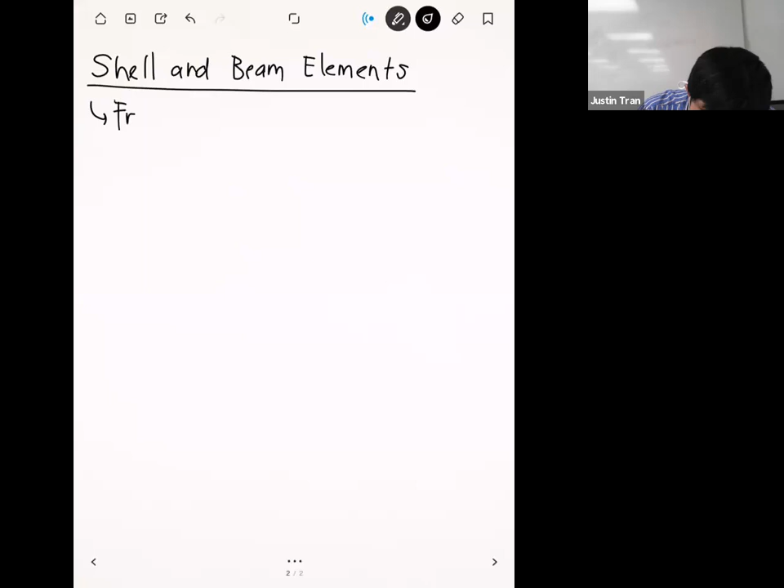So far we've covered a bunch of different element types, but they all kind of fit under the same category. So far we've covered what I like to call the solid elements. From this point forward, I'm going to assume that we're strictly in 3D. When I say the standard elements or the solid elements, I'm specifically referring to tetrahedrons and hexahedrons.

The reason we call them solid elements is because the elements themselves form a solid volume, a solid three-dimensional object. All of these elements have height, width, and depth because they're 3D. We've talked about these as kind of your only options for meshing a three-dimensional object, right?

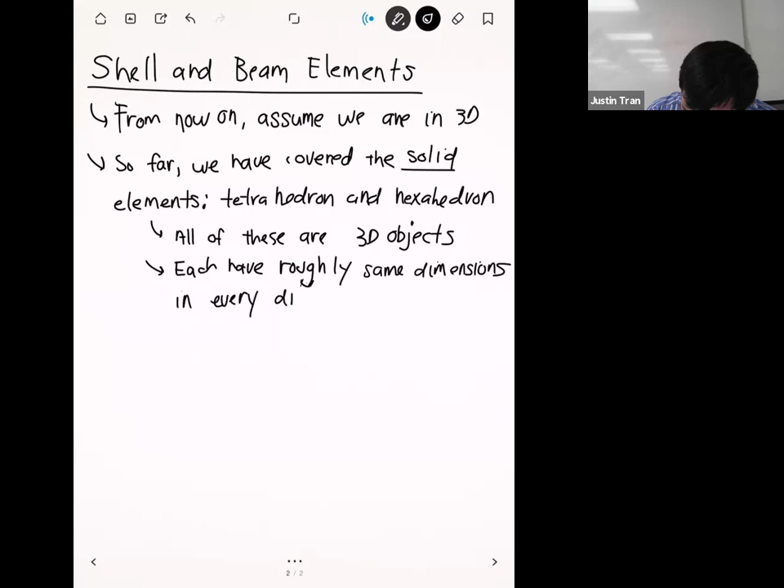Because of that, these solid elements work really well to mesh objects that look the same as that. If your solid object has roughly the same height, roughly the same width, and roughly the same depth—all three dimensions don't have to be exactly the same, but if they're all on the same order of magnitude—then your solid elements are going to work really well for these.

An example I have here on this desk is this mouse. If you look at the length of the mouse in this direction, the width in this direction, and the height in this direction, they're not exactly the same, but they're all roughly the same. So if you were to do a finite element analysis on this mouse, you could do it just fine, most likely with tetrahedrons, because it's so curved—hexahedrons might struggle a little bit with this one. But there's a lot of engineering geometries that actually don't fit this bill.

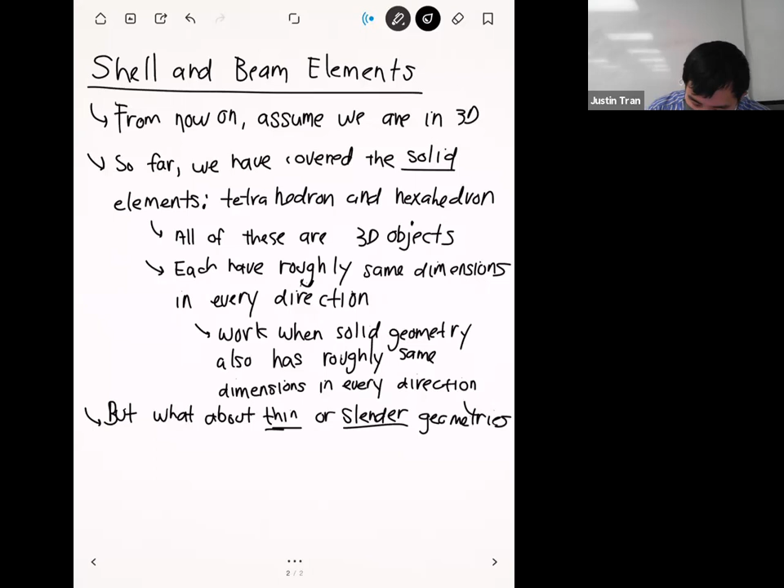What I like to call them is these are geometries that are either thin or slender. These are geometries where I characterize that at least one of the dimensions is significantly smaller than the other ones.

So one example here I have right in front of me is my phone. If you look at my phone, the width and height are kind of roughly the same, so they're the same order of magnitude. But if you look at the thickness of this phone, it's a lot thinner than it is tall or wide. This is what I'd consider a thin geometry, because you have one dimension of the phone which is much, much less than the other ones.

An example of a slender geometry would be like this pen. For this pen, you have one dimension that's fairly long, which is the length of the pen. But if you look at the cross section of the pen, both dimensions in that direction are much smaller than the other one. So that's something I would consider a slender geometry.

For these types of geometries, if you try to mesh them with solid elements, they can struggle a little bit. So what's actually more efficient to use in this case are more specialized element types for these situations. Those element types are called shells and beams.

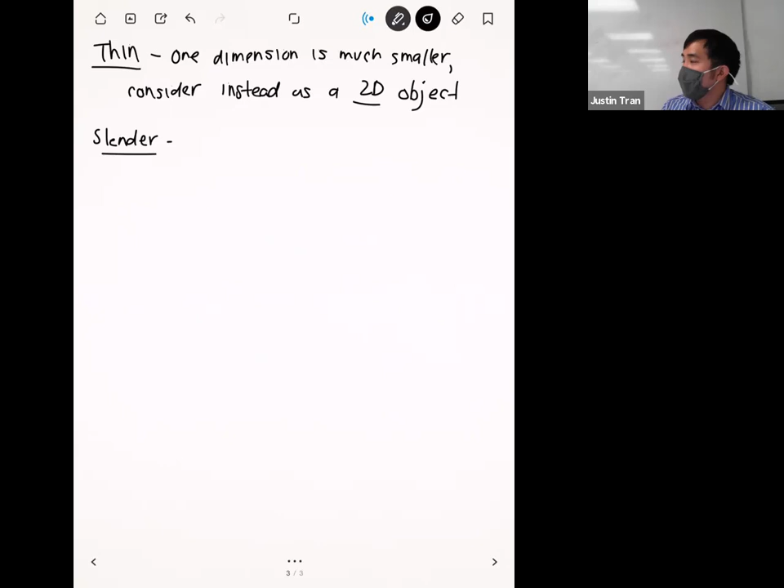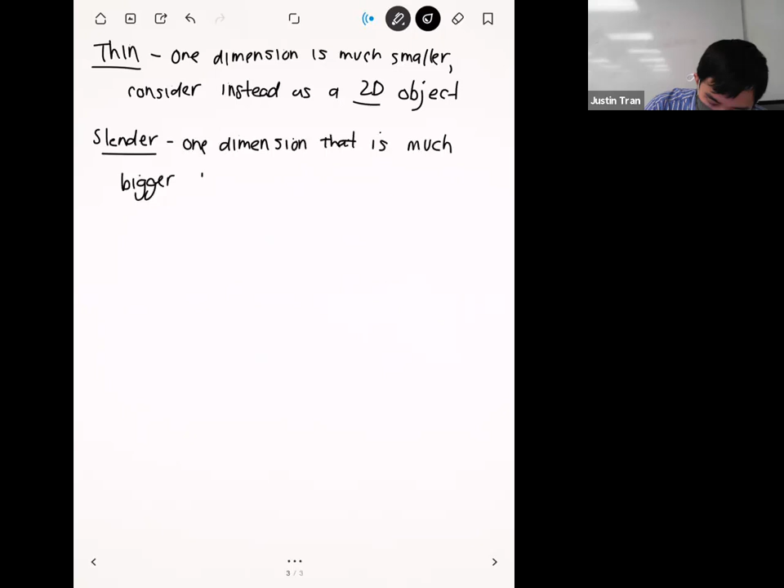And so for slender objects, these are kind of the opposite, where they have one dimension that's significantly bigger than the other two. Basically those other two dimensions may as well not exist for these objects. So we can save a lot of cost if we consider these slender objects as a 1D object.

So basically, let me draw an image for you. We have a very thin plate like this. What we want to replace this with is just a literal piece of paper, or a literal sheet. And if we have a three-dimensional beam, let's say we have a beam like this, we're literally just going to replace it with a line.

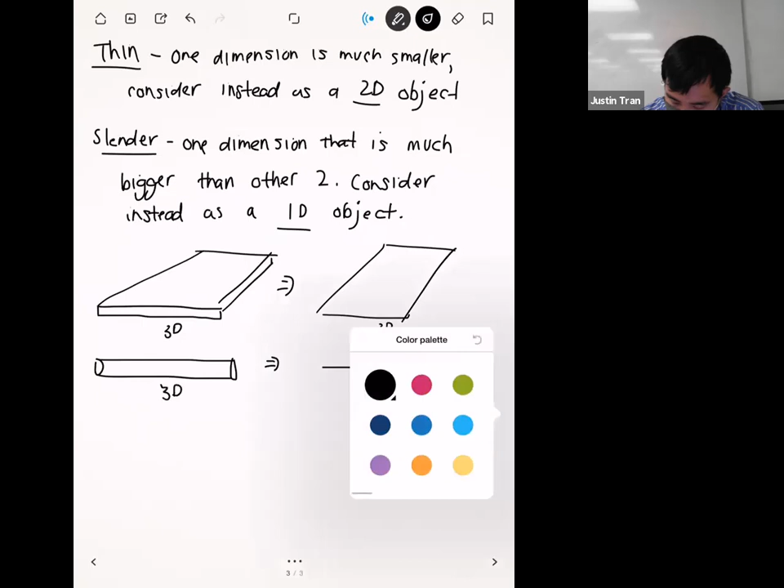So this would be the 3D version of these objects, and then we're going to reduce this down to 2D for the thin geometry, and for the slender one, we're going to reduce it to 1D. These special element types, an element type that can take a 3D object and replace it with a 2D one, are called shells, whereas a 1D representation of a slender 3D object, we call these beams. Hence the name of the lecture today: shells and beams.

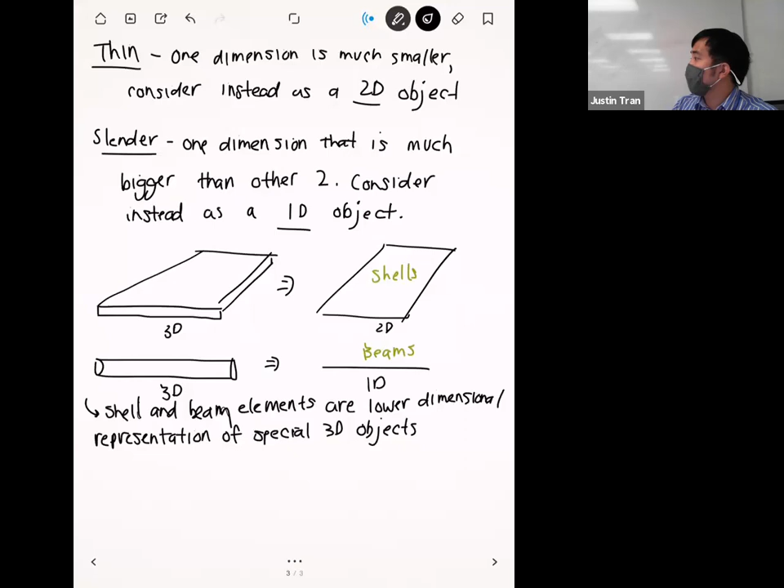We'll talk about each one individually, but to give a general definition for them: shell and beam elements are a lower dimensional representation of special 3D objects. And they're unique in that they have a different mathematical formulation. We're not going to go into what that formulation is, but we'll talk about the effects of that formulation.

And this formulation kind of gives us two main benefits, right? And it almost seems too good to be true, because what this different formulation gives us is a result that's cheaper, right? It's not going to take as much computational cost to use these small elements.

You'll have less nodes and less elements overall when you switch to shells and beams, for a specific case. And it actually gives you a more accurate result.

Because remember, usually we don't get this. Usually if we want a cheaper finite element simulation, we're going to have to sacrifice accuracy. Whereas if we want a more accurate finite element result, it's often going to cost us more computational power to do that. The use of these shell and beam elements actually gives us both at the same time, which is a very unique thing.

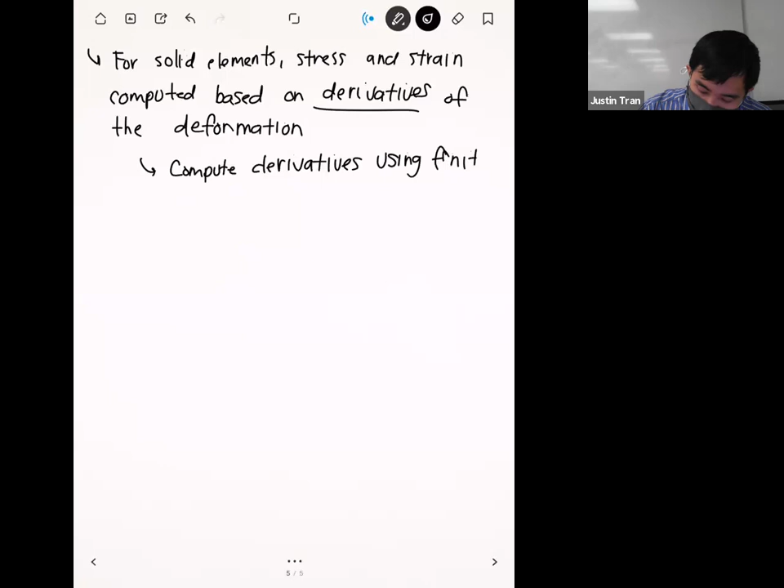Finite difference is a big method that we could spend a lot of time talking about, but I just want to make one important point here. Let's say we have a particular element like this—a 2D element—and let's say we want to compute the derivative of the solution in terms of x.

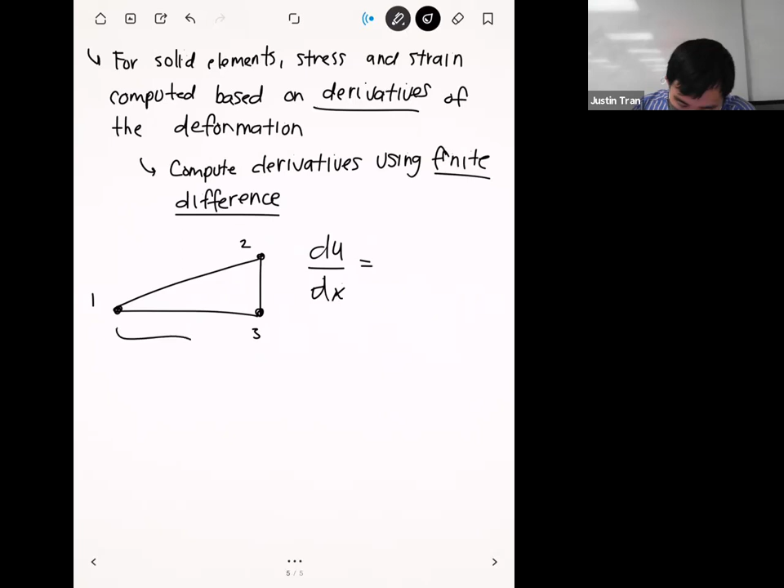The way it does this is that it literally takes the difference between two solution values at two different locations in the mesh, and then divides by the distance between them. Let's say the distance between these two points is Lx. We have the solution at node 1 as U1, and the solution at point 3 as U3. The finite difference approximation of this derivative is literally just U3, the solution at node 3, minus U1, the solution at node 1, divided by the distance in between, Lx.

For cases where you have a geometry that's not thin or slender, this is perfectly fine. If you have a decently thick geometry with lots of different elements through every single dimension, you're going to be just fine doing this. But what can happen sometimes when you have a thin or slender geometry is you might have situations where you only have one, maybe two elements through the thickness of your geometry.

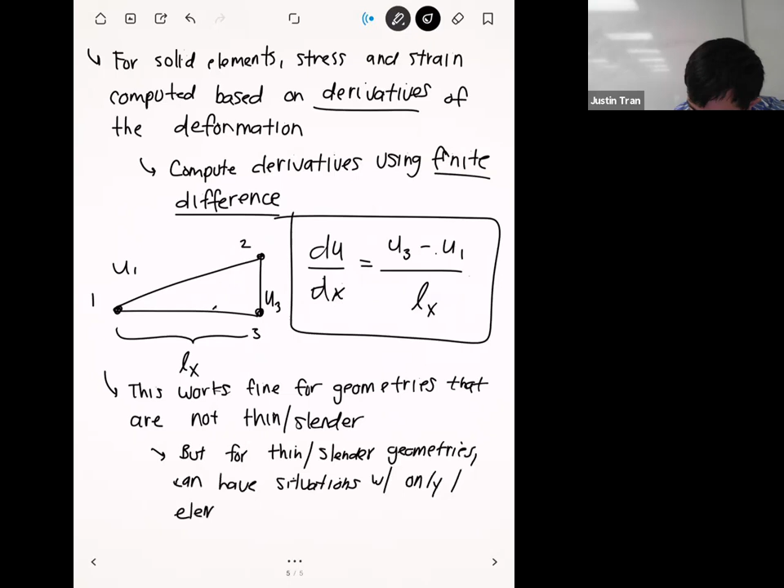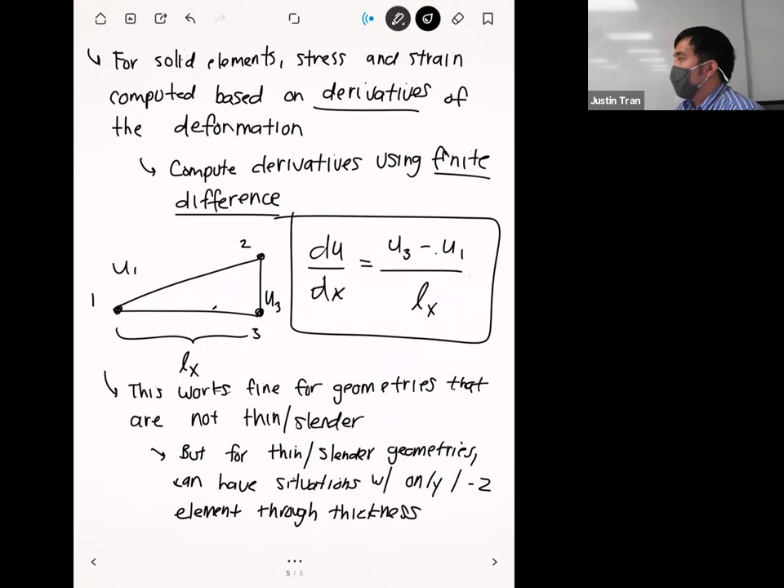What I mean by that is if you look at your geometry and mesh, going from one boundary surface to the other, you only cross one or two elements. I'll draw a picture of this on the next page to make it clearer. But in these situations, you want to be careful when computing derivative-based quantities, because they can be unreliable—all the nodes used in this calculation are on the boundary. Because these nodes are on the boundary, and in some cases both nodes are on the boundary, you kind of already pre-prescribe what your derivative is based on the boundary conditions you apply. Even if you don't apply any boundary condition there, being on the boundary means you're also subject to certain edge effects. We'll talk about that more on the next page where we draw the picture. Any questions on this?

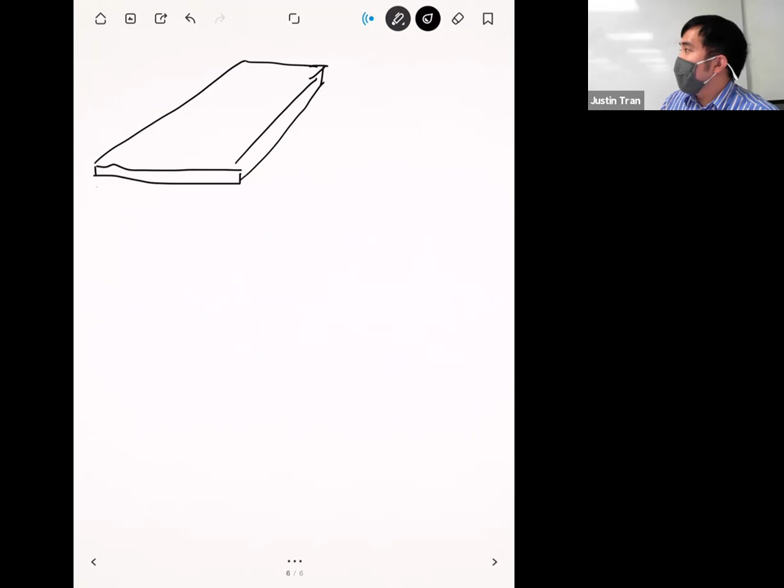Okay, so let's draw a picture to show what can happen if you have a thin geometry, just to make it a bit more clear. Let's say that we have a very thin plate. Maybe this is part of your finite element geometry.

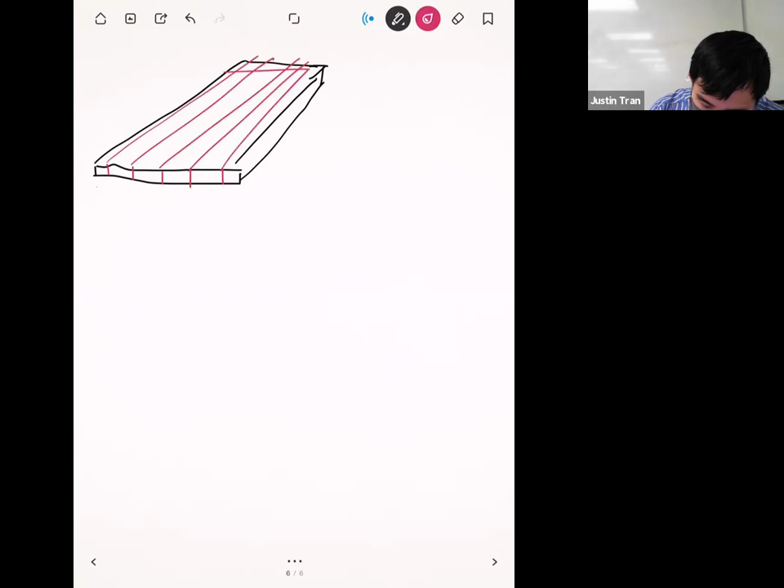And then let's put a mesh on this. Let's say that we mesh it in a way that looks like this, and of course these element edges go in this direction too.

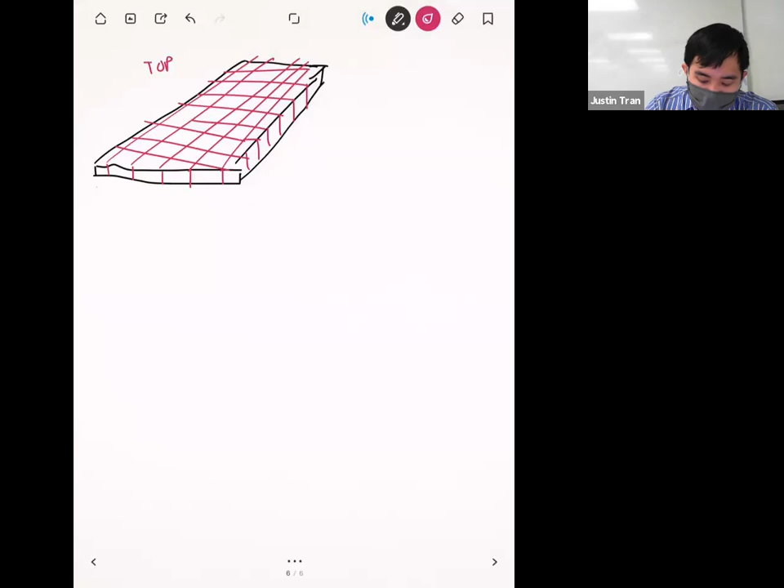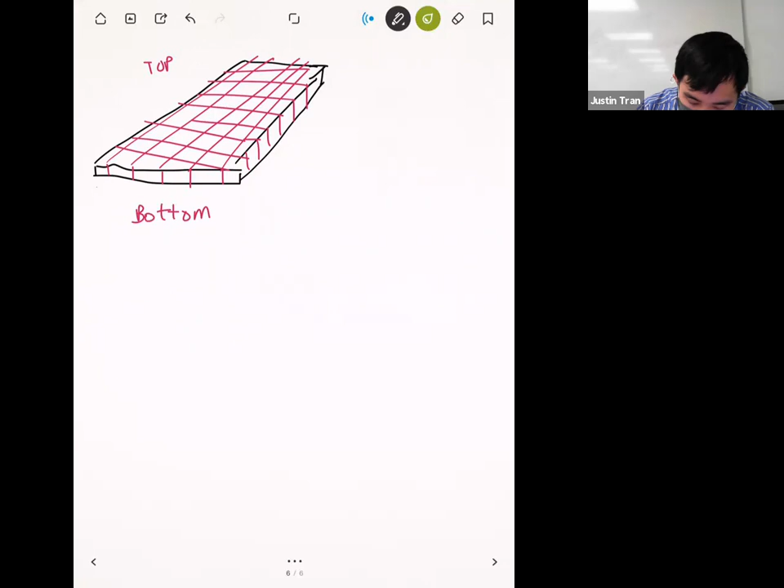In this situation, if we look from the top of this geometry to the bottom, and we take this path—we'll just look at the very front, from here down this direction—we only cross through one element. So this is a situation where we only have one element through the thickness of this geometry.

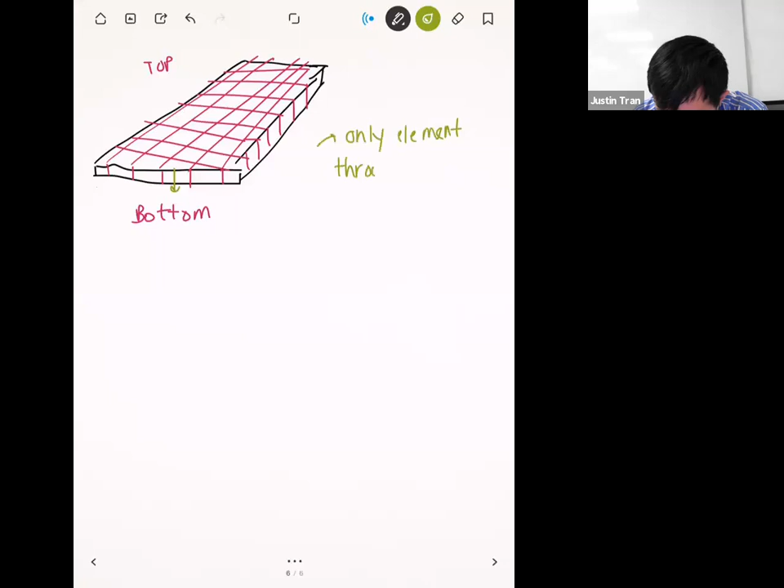Imagine if we were to take a derivative in this case. If we want to take a derivative in that direction, going from top to bottom, the nodes we would use for that are this node right here and this node right here—both these purple nodes.

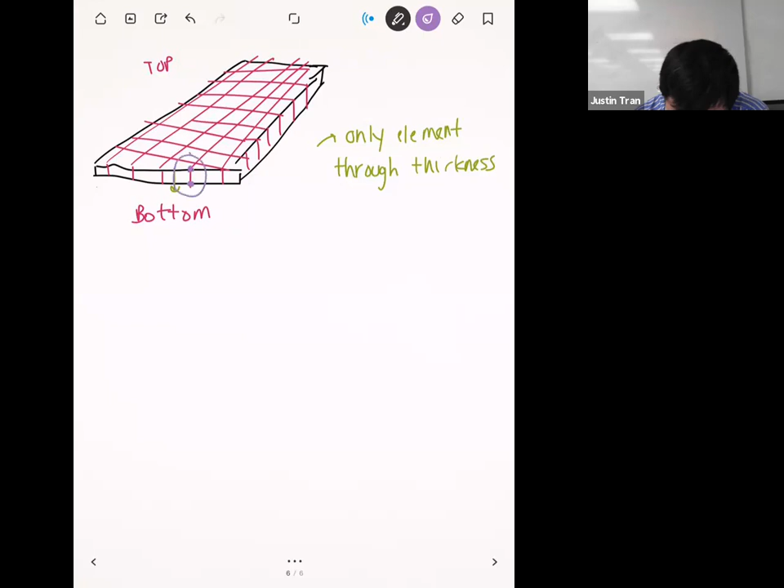And so the issue with computing a derivative with nodes like this is that both of those nodes are on the exterior of our geometry.

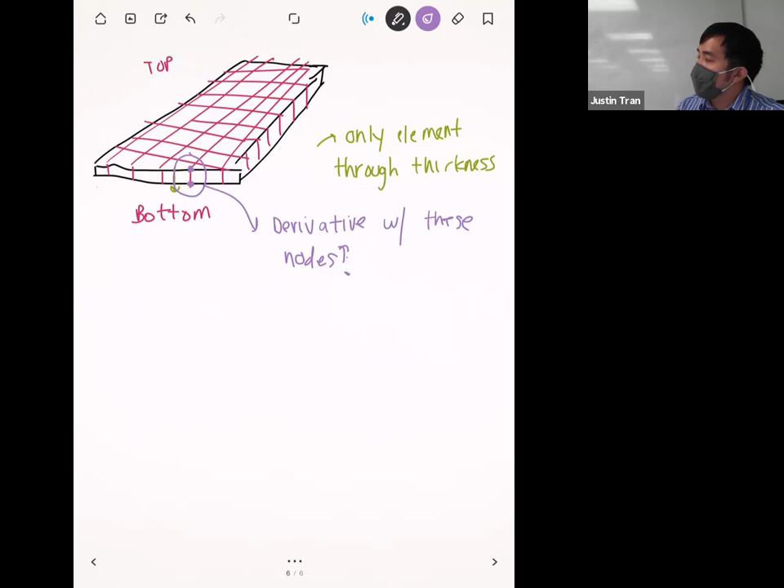And so that's usually not a good idea because if you have nodes that are on the geometry, first of all, if you're applying a boundary condition there, like some kind of force or a fixed constraint, that's going to mess up the computation of the derivative there, especially if you apply a boundary condition on both. But also you can have what I like to call edge effects, which create sometimes undesirable effects on your solution. So you want to avoid situations like this when taking derivatives from nodes that are both on the boundaries.

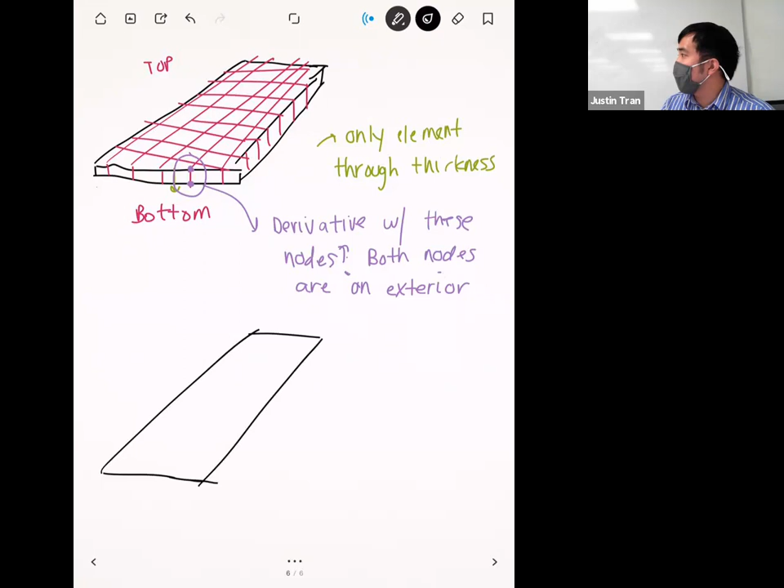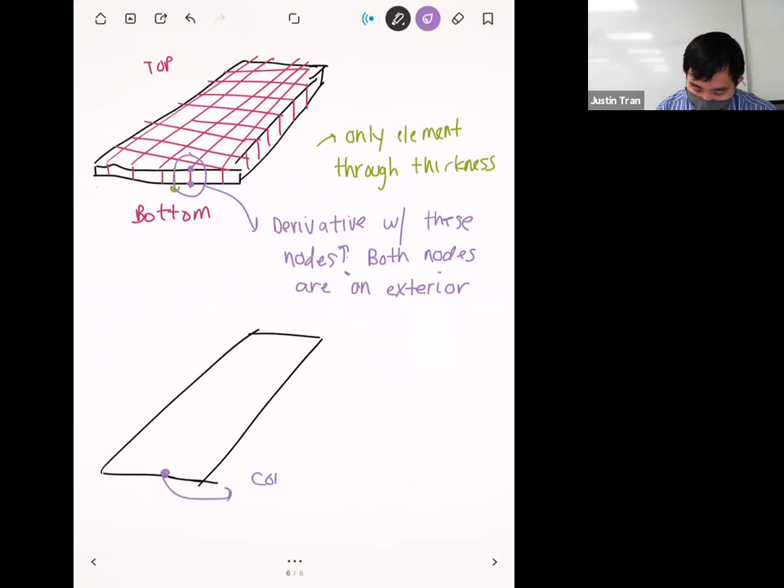So one way we can get around this is if we instead replace this thin geometry here with a simple 2D one—let's say we replace it with a sheet, a 2D sheet like that. And then let's say we want to do the same exercise where we want to compute the stress right here.

Instead of relying on a solution derivative in this situation, what we can do instead is use the extra degrees of freedom that we're computing—we can utilize the nodal rotations here to compute the stress more accurately.

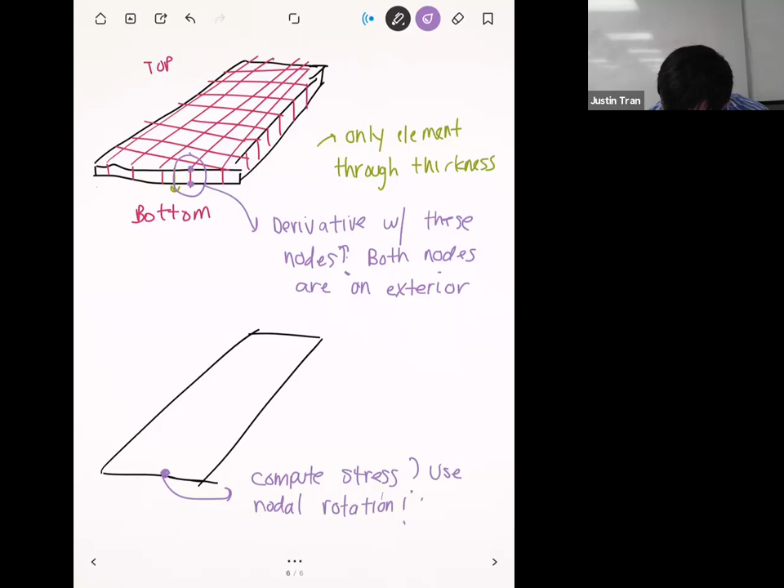And what this does is help us avoid taking derivatives at that location. The stress is computed based on these rotations instead of derivatives. First of all, it saves you from computing derivatives, which is itself a little bit of an expensive process—not that expensive, but it's something. And because these rotations are directly computed from the finite element result, you end up with a more accurate solution overall because of it.

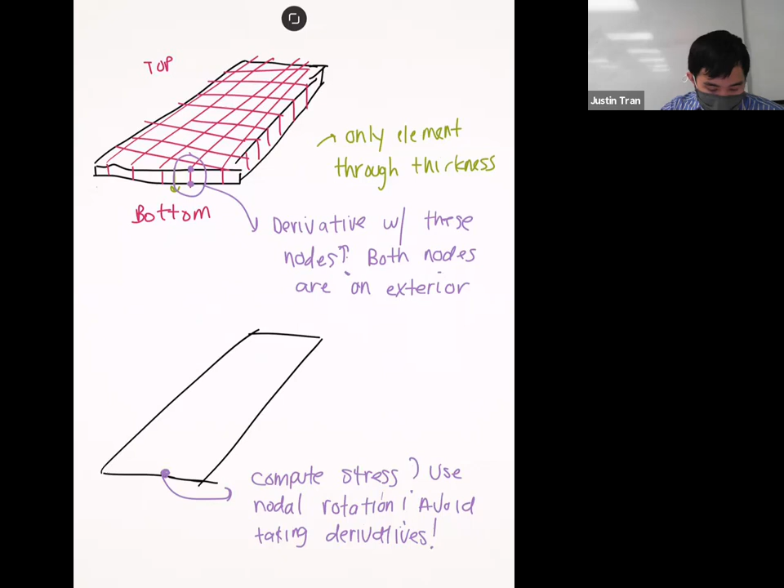So that's the justification for why, when you can use shell and beam elements, you end up with a higher quality, cheaper solution overall. Any questions on this?

Question from the chat: would it be possible to compute the nodal rotations for a solid element? I'd assume yes, just needlessly expensive. Yeah, no, you're exactly right.

It is technically possible to compute the rotations in a solid element, it just adds a ton more cost. And it's not just computing three extra variables for each element—it actually modifies the equations quite a bit, so it would have to be a whole new implementation to compute those things. Good question.

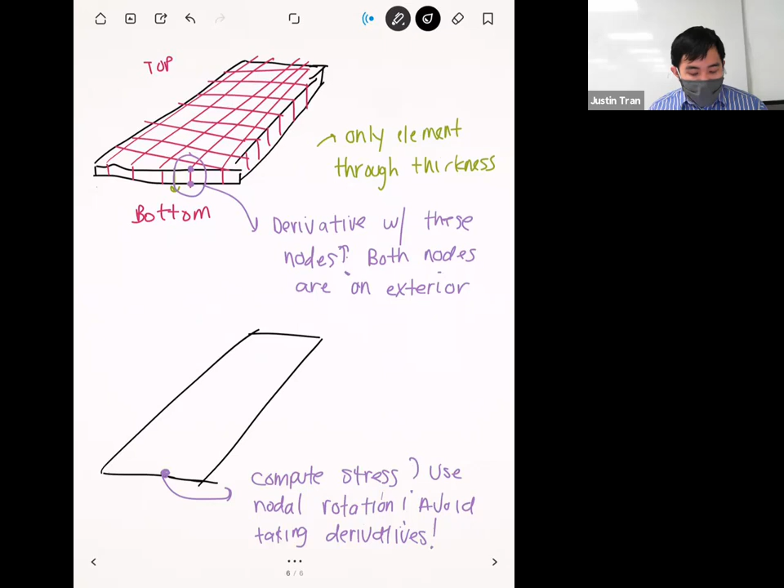Any other questions on this? Okay, so that's the justification for why shell and beam elements are useful. So now let's talk about when you can use these and how to actually implement these in practice.

Throughout today I've just been mentioning that you should use shell and beam elements when your geometry is thin or slender, with air quotes included. But what does that actually mean? Is there a threshold for when something is thin enough or slender enough that you want to use shells and beams?

Okay. Because it would be really nice if we can say that this has certain geometric dimensions, and so for sure we should use shells and beams for this.

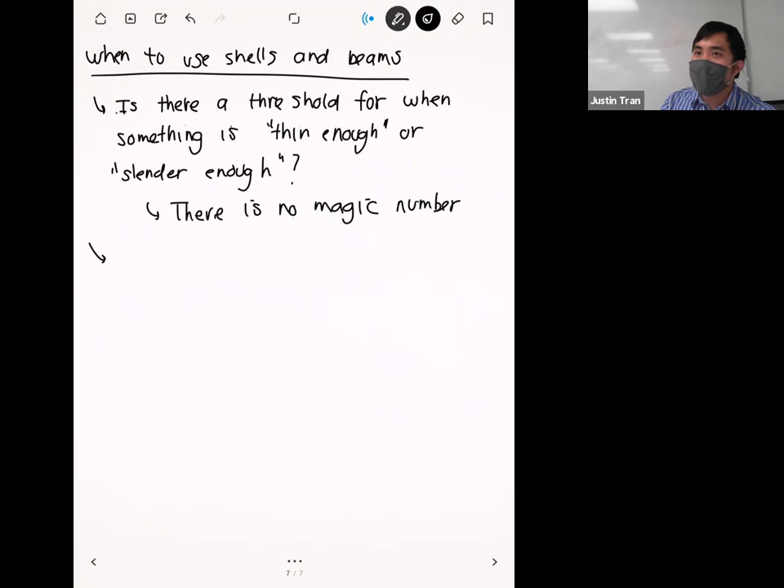My threshold for using shells and beams is I like to use a 10% rule. What I mean by that is if there's a dimension that's less than 10% of the other dimensions, then I consider that to be thin or slender.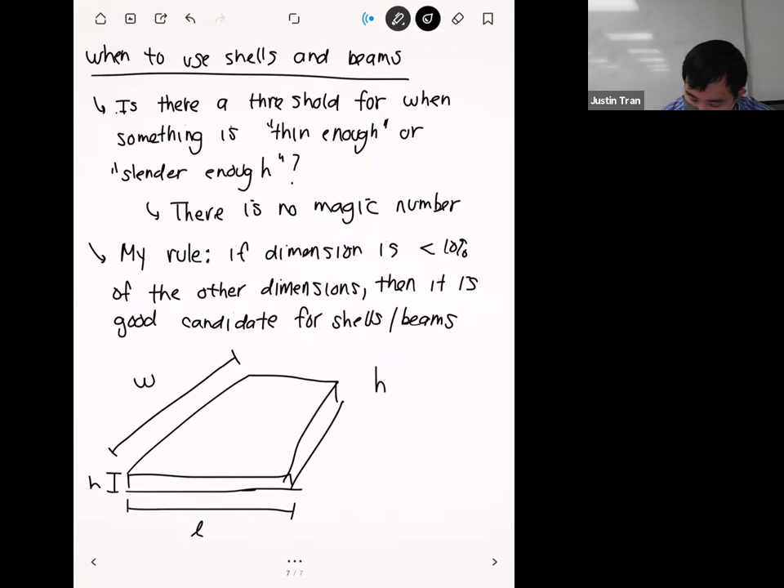As an example, if you have a thin plate, let's say this is the height of the plate, this is the length, and this is the width. You can see from this image that the height is the smallest dimension we have. So my criteria is that if the height is less than or equal to 10%, or 0.1 times the length, and h is less than or equal to 0.1 times the width...

Then this is the criteria I use to say that this geometry is thin enough that I can replace it with a shell. This is my own personal threshold, and it's served me well in the applications I've used it in, but I also know people who would disagree with me, so keep that in mind.

Any questions on this?

All right, so now let's talk about how we actually incorporate these in practice. This is a bit of a preview of what we're going to do on Wednesday, but I wanted to talk about it in lecture format before we're actually clicking stuff in ANSYS, just so you know what's going on.

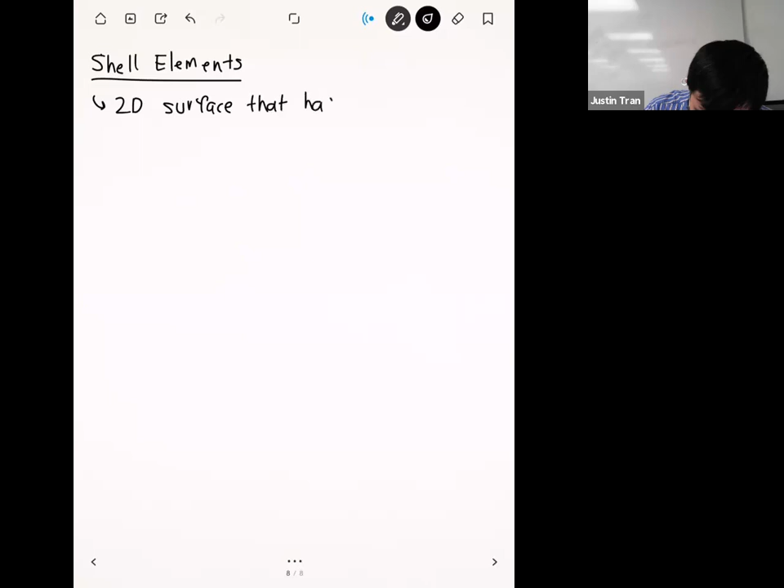All right, so let's start with shell elements. The definition of a shell is basically a surface that has a very small thickness. So it's a 2D surface with a small thickness, and it's used to represent geometries that are very thin.

But what it does is that instead of representing that thickness geometrically, instead of having an actual three-dimensional object, it flattens it into a 2D object, basically a piece of paper, and then it stores the thickness as a material parameter, a material property.

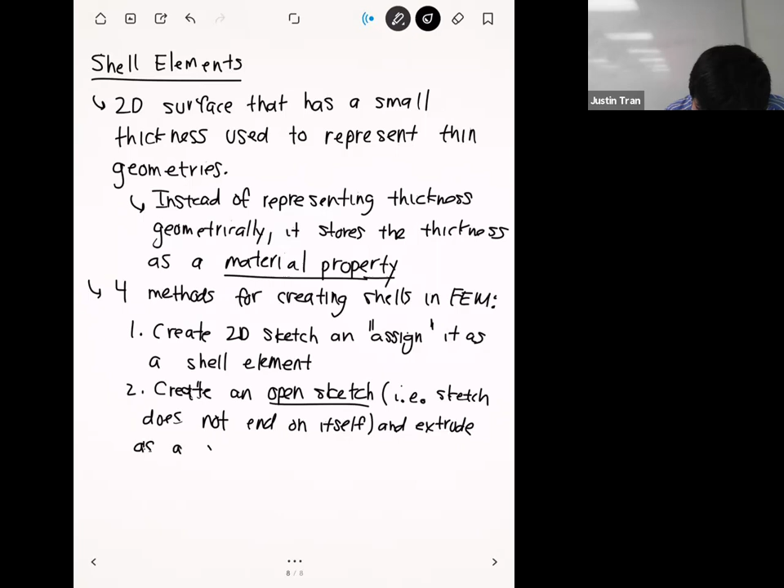Let me draw what that looks like before I move on. In order to use that second method, you're going to start with an open sketch. Here's an example: let's say we draw a line just like that. Then to turn this into a shell, we're basically going to take this line and extrude it into the page. So we start with a sketch like this, and then we just extrude it into the page, and we end up with a very thin sheet in the shape of whatever we drew out.

Any questions on this so far? What do you mean by sketch does not end on itself? Yeah, so this line that we have right here is an open sketch. If this were a closed sketch, I would connect this end down to this one right here. The fact that it's open means we just have a line with two open ends.

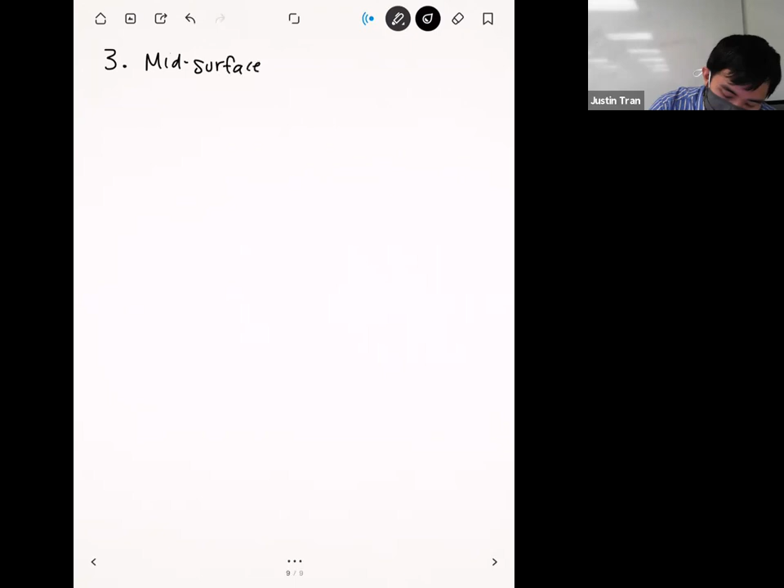Option 3, and this is the one we're going to use on Wednesday—I'd say this is probably one of the more common ones—is to use a mid-surface operation. What the mid-surface tool does is it basically takes two parallel planes and creates just a thin plane right in the middle.

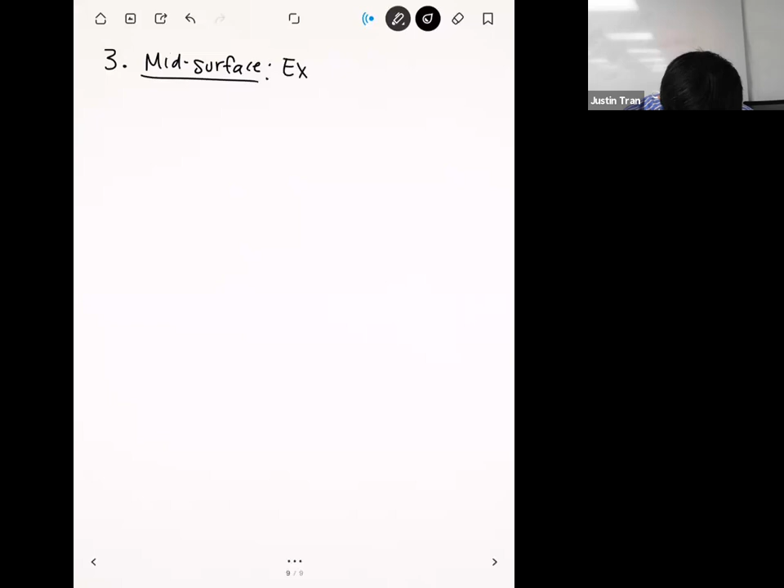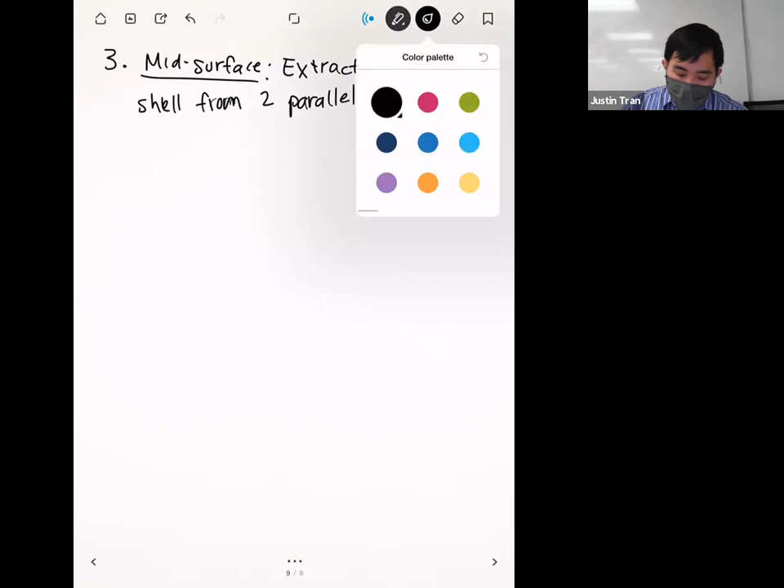Ideally, these two parallel faces should be pretty close to each other, right? That's what forms a thin body. By creating a surface in the middle of them, that kind of replaces it. Let me go ahead and draw you an example here. Let's say that we have a geometry that looks like this.

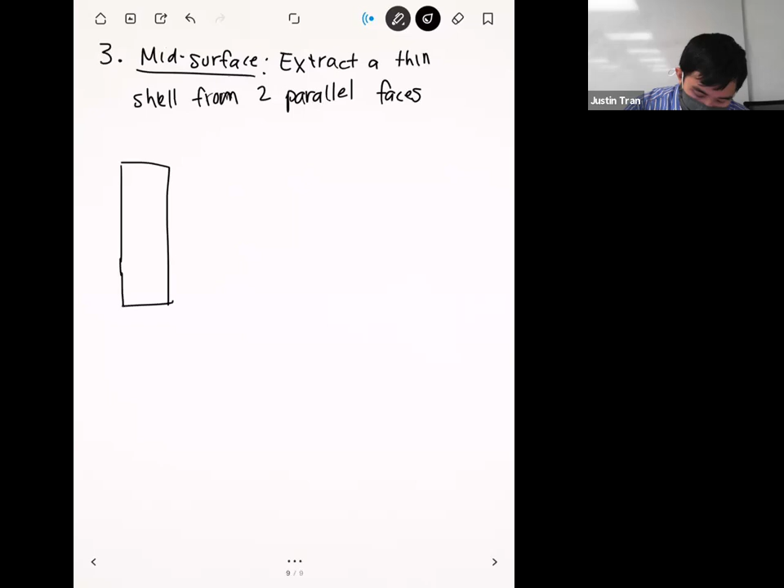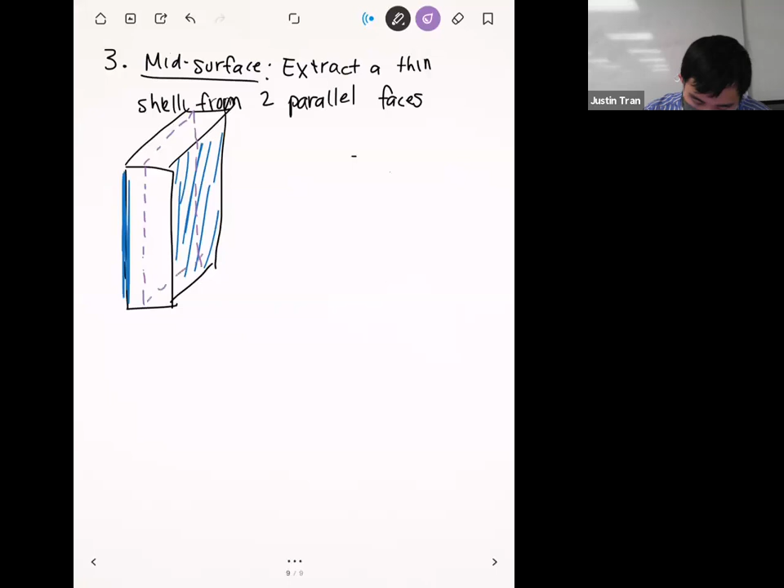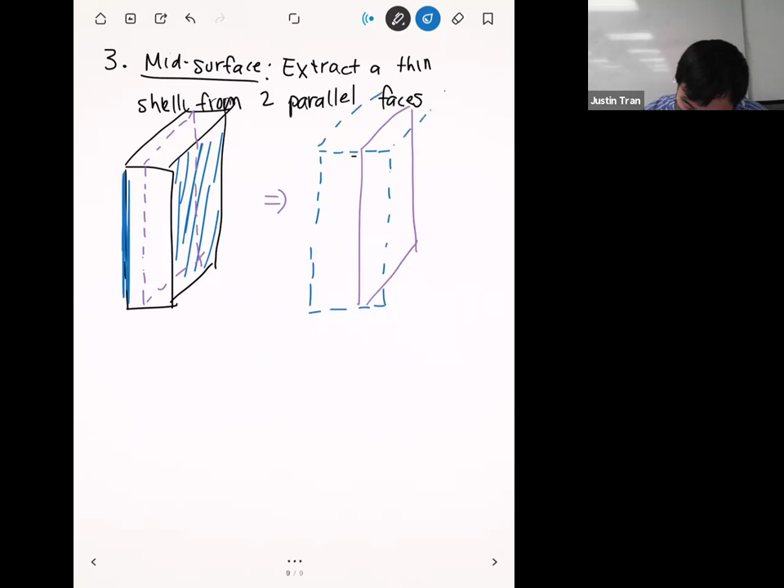What the mid-surface operation is going to do is say, okay, I have this plane right here in blue, that's really close to this other plane that's parallel to it on the other side. The two sides of this box are very close to each other and parallel. So let me create just a plane in the middle, and it's going to draw a shell that goes right in between them, then replaces that plane with that shell. That's why it's called a mid-surface, because it literally creates a surface in the middle of the two parallel faces. That's the one we're going to use on Wednesday.

From the geometry that I'm going to give you, you're going to use several mid-surface operations to create thin shells.

This last one here I'd say is something more niche to ANSYS. I've seen this done in ANSYS, although I haven't really seen this in other softwares. In ANSYS they have a feature called a thin surface tool. What this will do is extract a thin shell of an otherwise solid object.

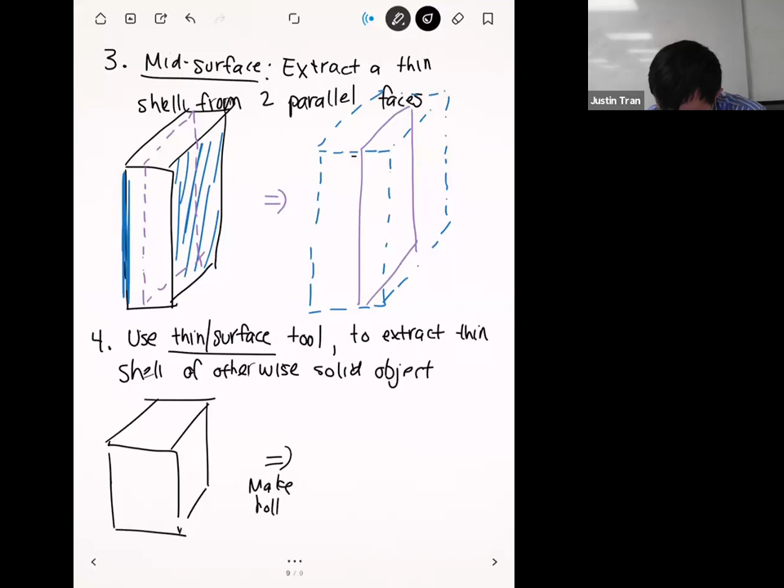This is really hard to draw, but the way it works is it'll look kind of like the same thing as your object from before, but you're going to have one open face. To use this tool, you have to specify which surface has to be open. Then all the other faces of the cube now turn into shells, which are incredibly thin. You can almost think of this as taking your object, hollowing it out, and then making a hole on one part of your surface. You have to define that thickness.

Yes, for this one you have to define the thickness and input the number. It's similar to the shell feature in SolidWorks where you shell it and do the thickness. Yeah, it's exactly like that. I think if you use the mid-surface, it'll automatically determine the thickness because it already measures how far the two parallel faces are apart. But for the other features, you have to input the thickness yourself. For number 4, I can't say I personally use this for anything other than tutorials. I mostly use number 3, but that one does exist for some purposes.

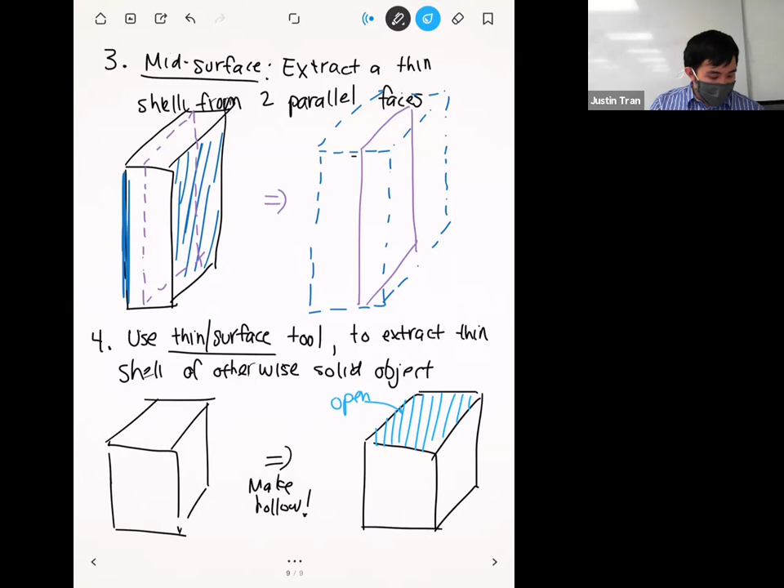Okay, so now let's talk about beam elements. A beam element is a one-dimensional element, and this is meant to represent slender geometrical features. It's unique from the shell, whereas in the shell we're basically eliminating one dimension from the object, when we're creating beam elements, we're essentially eliminating two dimensions.

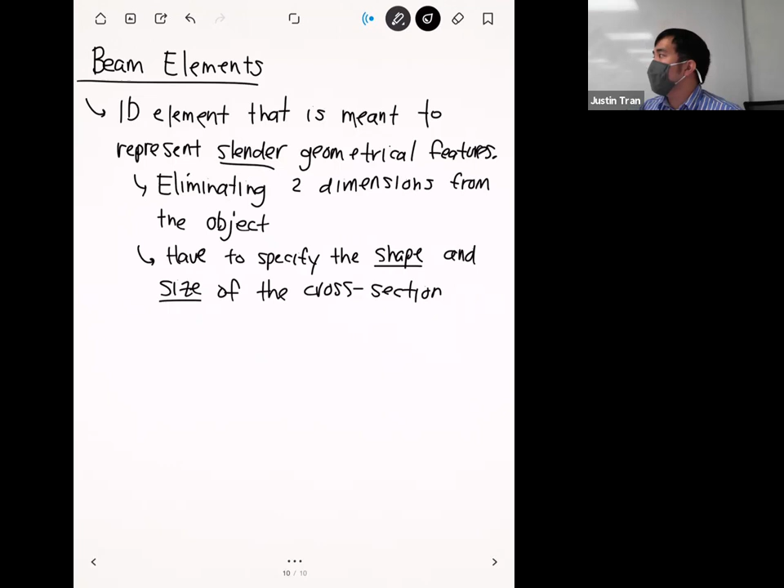If you think of a beam, there are lots of different cross sections available. You can have an I-beam, a cylindrical rod, an L-beam. When you're eliminating those two dimensions within the cross section, you have to mathematically describe what that cross section looks like. We'll go over how to do that on the next page.

But let's talk about the cost for beam elements. Because these are just 1D elements, these are extremely cost effective.

Let's talk about the number of nodes in a 1D element. The most basic 1D element only has 2 nodes per element, so that's extremely cheap. Even the quadratic one only adds 1 additional node. The quadratic version of a beam element is probably the cheapest element you can get that still gives you good results. These are really, really good.

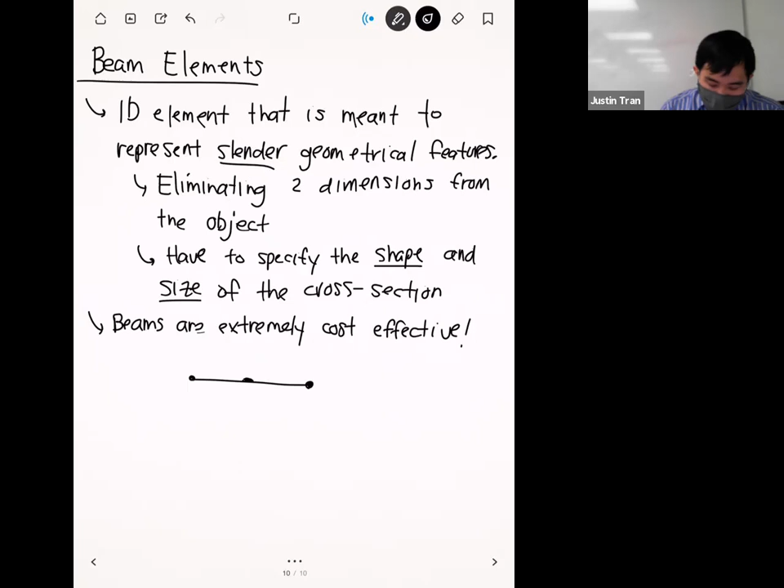There are two main methods to create beam elements for FEM. The first is to create a 1D sketch and assign it as a beam, which is very analogous to the first two methods we talked about for shells.

Method one works really well if you have control over the CAD and can plan ahead that you want certain parts of the geometry to be beams. But that doesn't happen all the time, and a lot of times you're given a CAD model. In those situations, you're going to use method two, which is called beam extraction, and that's what we'll use on Wednesday.

What you're basically going to do is extract slender parts of the geometry as beams. That's mostly just a point and click process where we turn on the extraction tool within ANSYS SpaceClaim, click on the geometries we want to be beams, and poof, like that, they turn into beams.

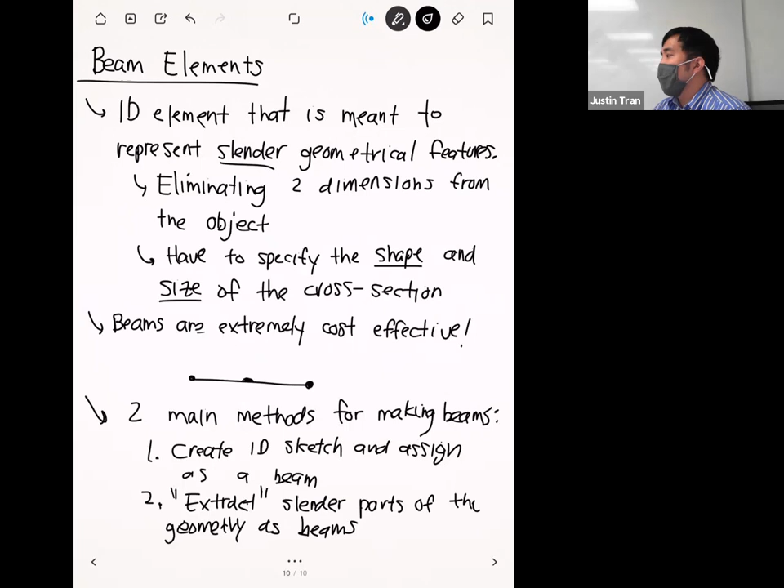So it's a little bit of an easier process than creating shells. But what you'll see is that the difficulty in using this is the cleanup afterwards. Making the beams itself is easy, but making it work with the rest of your model can be difficult. Any questions on this? Okay.

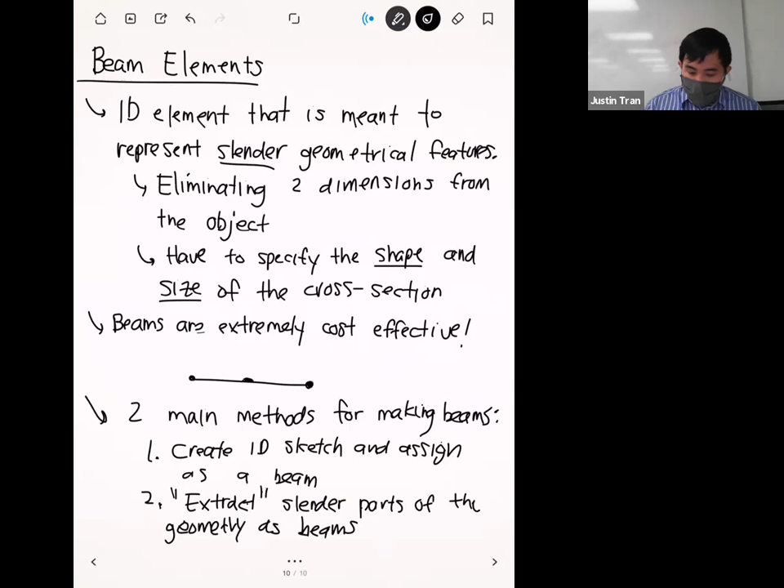So let's talk about the cross sections again. It's really important for beams to know what their cross-sectional size and shape look like.

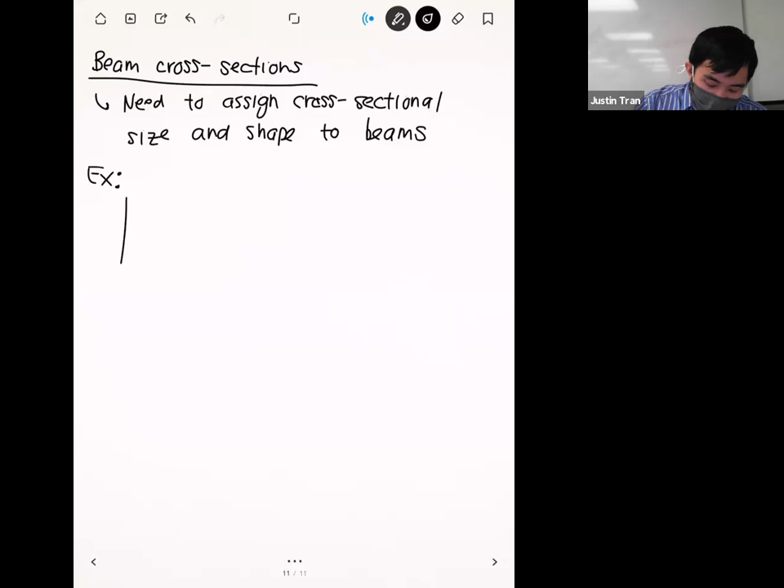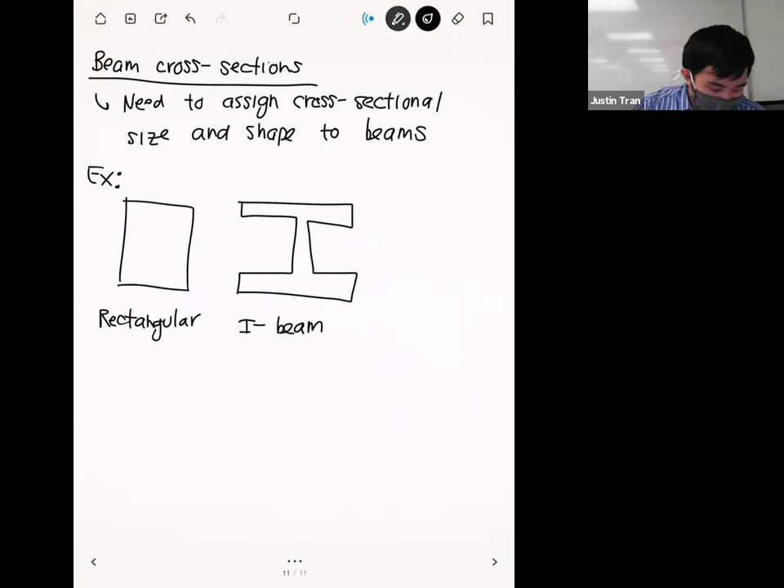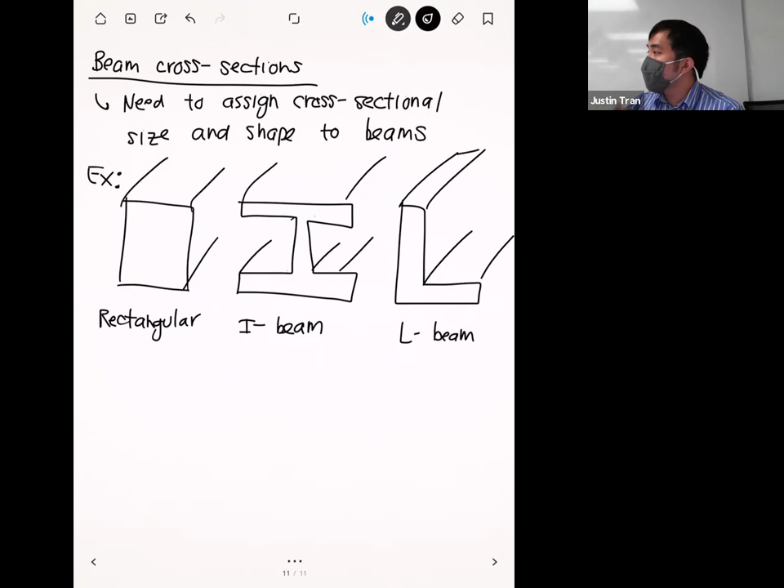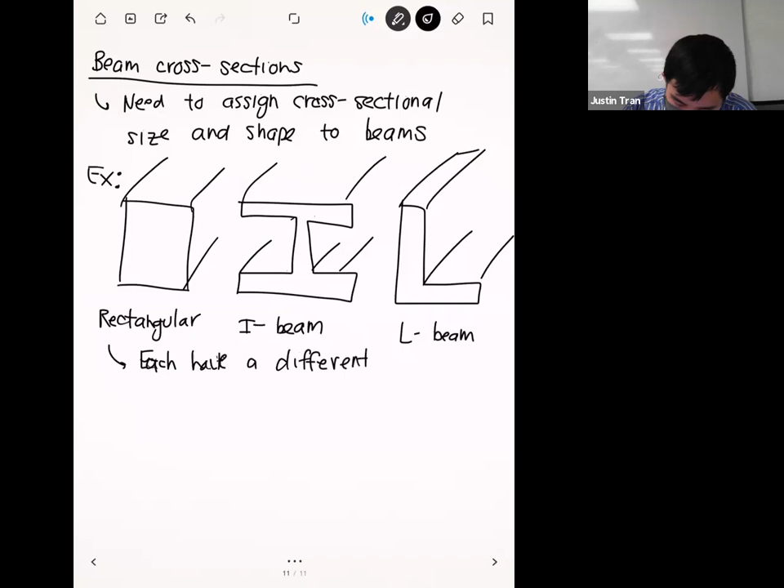But whether you have a rectangular beam, an I-beam, or an L-beam, the shape of the cross section is going to affect your results, because each of these cross sections has a different moment of inertia. In order to solve the beam equations and actually compute the rotations we talked about, it needs to know what that moment of inertia is, and it gets that information from the cross section.

One quick tip, specific to method one: when you're drawing a line in your sketching tool and assigning it to be a beam from there, it can be useful to actually render the cross section within the CAD.

Because what you're going to do on method 1 is you're going to basically draw your line, and then you're going to basically draw out the cross section in a different window. And then what ANSYS is going to do is take your cross section and orient it in a semi, okay, not really random, but it does it in kind of a standard way that you might not like, right?

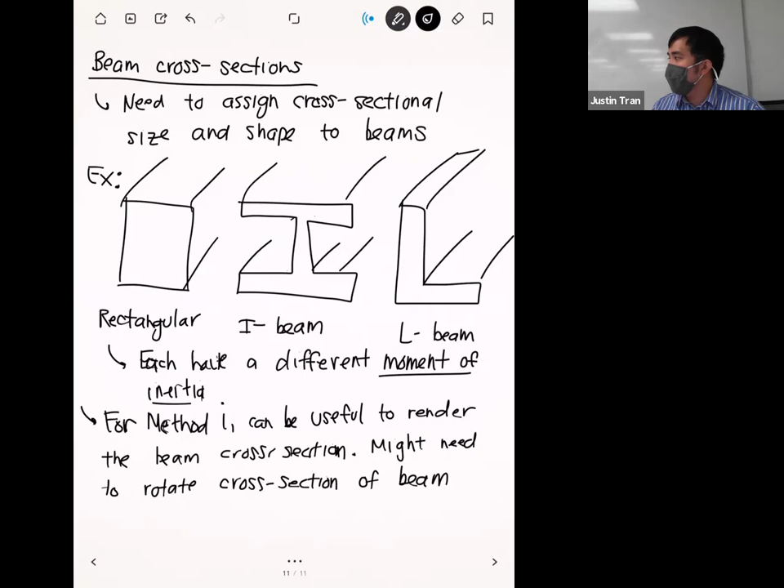All right, and so you know, method 2 is actually very simple to do. It's just going to be you point at a beam and then you click and then it creates one. So all this time today, I've been talking about using shells and beams can be difficult and kind of annoying. Let's give you a sneak preview of the activity on Wednesday to show why it can be annoying sometimes.

The main difficulty is that when you're taking parts of your model and reducing its dimensionality, you're basically removing dimensions from certain parts of the geometry. The main challenge is that you're going to have some geometrical inconsistencies, so some parts that should be touching each other, that should be making connection, all of a sudden they might not be touching each other anymore. And then what you're going to need to do is either extend parts or move parts around so that they actually meet up again.

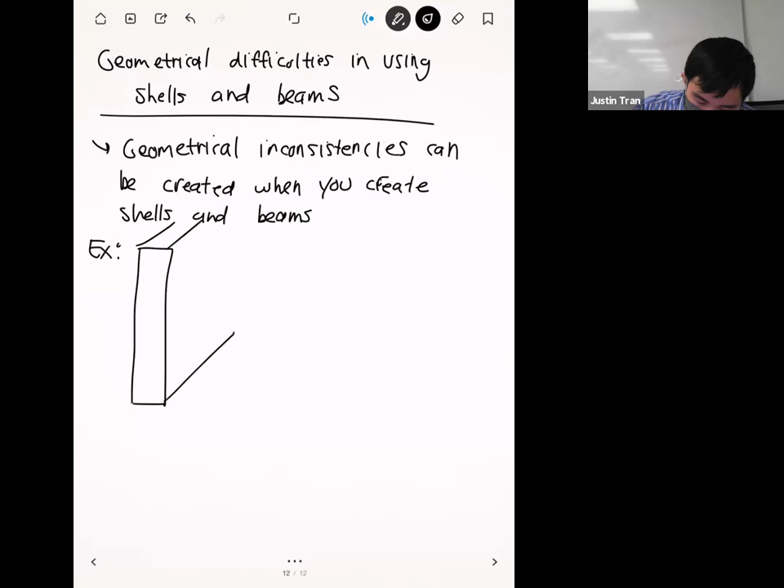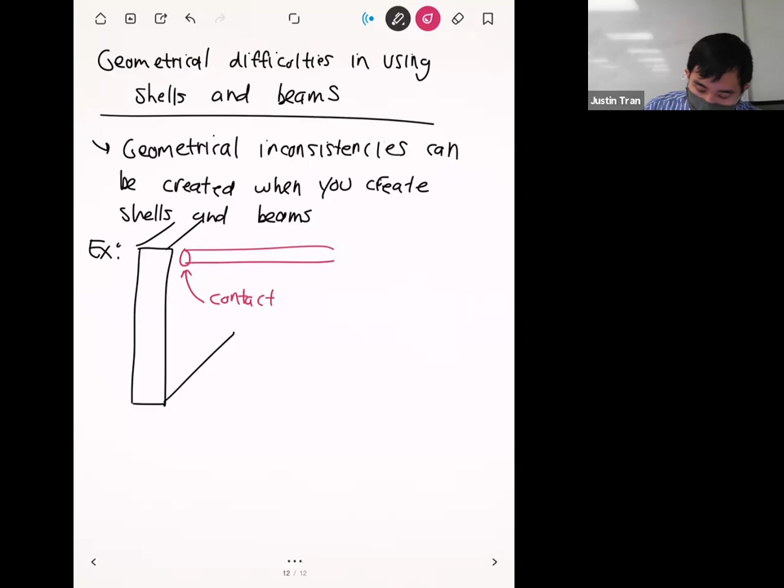All right, so just as an example, let's say that we have a thin surface like this. And then connecting to this thin surface, let's say that we have a slender surface, a cylindrical beam that goes like that. Normally in the three-dimensional CAD, these two parts here make solid contact. So ANSYS can recognize this, and it says that these two parts of your geometry are connected to each other, and it automatically will say that we can say these two parts are bonded, or they're frictional, or they're rough, or whatever contact type that you want.

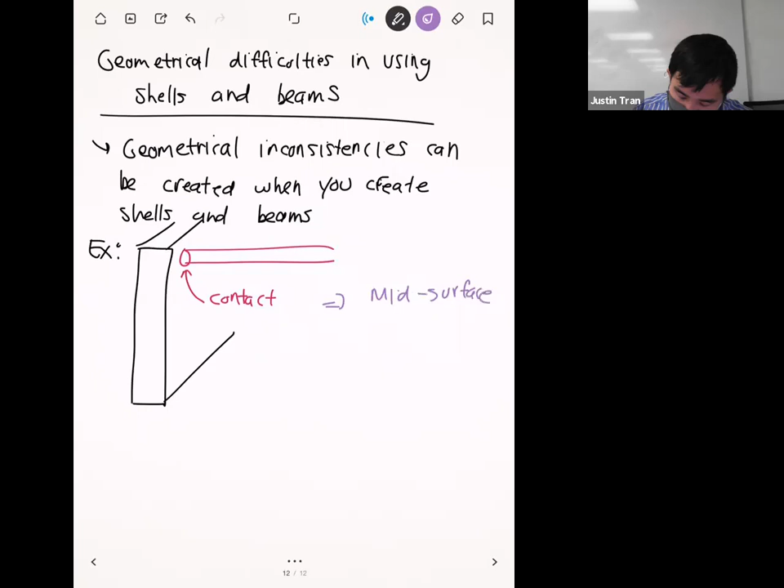But what can happen is that, let's say that you recognize that this kind of black box here on the left is a relatively thin geometry, so let's go ahead and do a mid surface. And not even touching the slender geometry yet, let's say that we create our mid surface operation just like that. And then we have this beam right here. It's a little bit hard to tell because my drawing sucks, but what you can basically assume here...

...is that by creating this mid surface here that's in between these two, then you're going to create a gap in between where that surface was and where the beam ends. Whereas before there wasn't a gap when there was a fully 3D model, but now that we've replaced it by a thin slender sheet, now there's going to be a gap right here.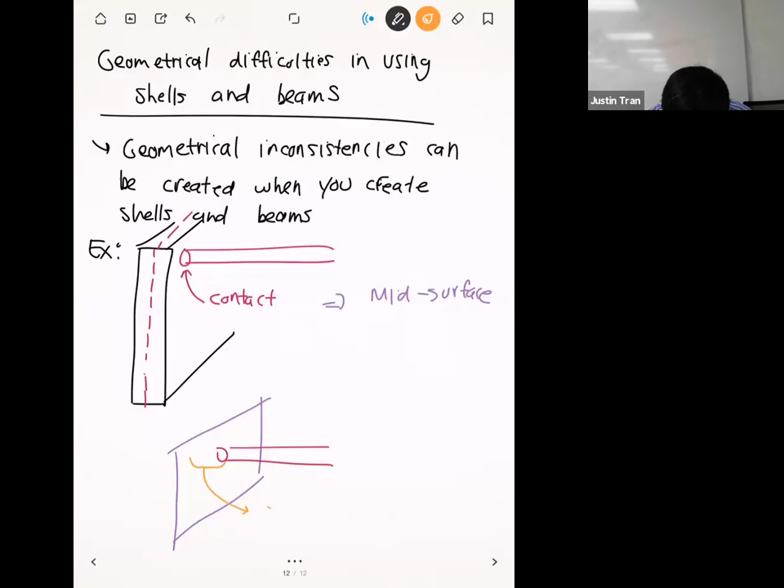And now all of a sudden, if you go into ANSYS Mechanical and try to run a simulation on this, ANSYS is not going to recognize that as a contact. It's not even going to let you make a contact because they might be too far apart now to do that. So what you have to do in this situation, in order to actually run a simulation, is modify this geometry a little bit. Creating gaps is something that's very common in these ones, so what you can do is there are tools within ANSYS that let you extend parts of the geometry.

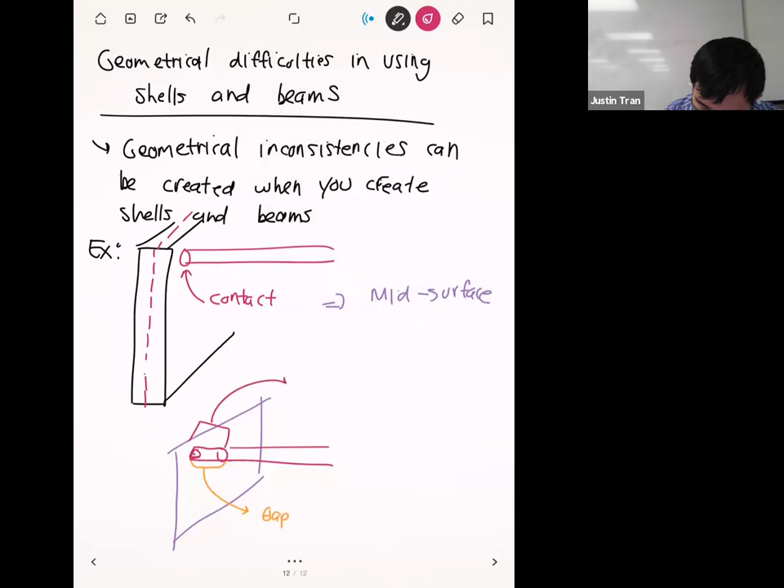By extending, you can basically make sure that when you create a mid surface, or maybe create or extract a beam, anytime you have geometries that look like they should be touching but they're not, you can use the extend tool to make sure that happens.

But there are other examples too, which I can draw on the next page. This is a relatively simple fix, and there's an automatic tool for this, but there are other kinds of inconsistencies that can happen too. Any questions on this?

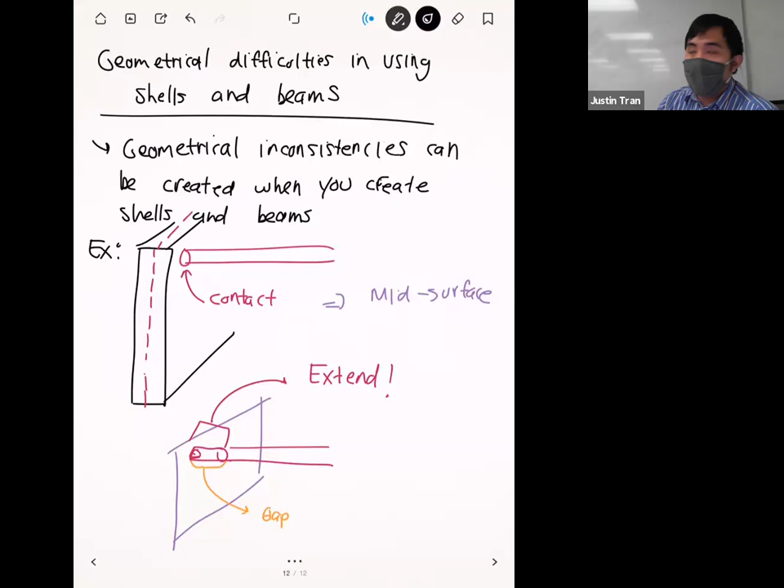All right, let me draw you one, probably the most annoying thing that we'll do on Wednesday, and then we'll wrap it up for today. So let's say that we have a situation where we have a beam.

Let's say that we have a very slender beam, just like this, and it's making contact with the surface that's like this. I'm not going to touch the surface on this one. I'm going to focus this one on the beam.

Let's say that we extract this beam, and when we extract the beam, ANSYS chooses to make a 1D element or 1D surface that's just like this line right here. It's a little bit hard, so let me just draw a simple line. It made the beam a little bit lower.

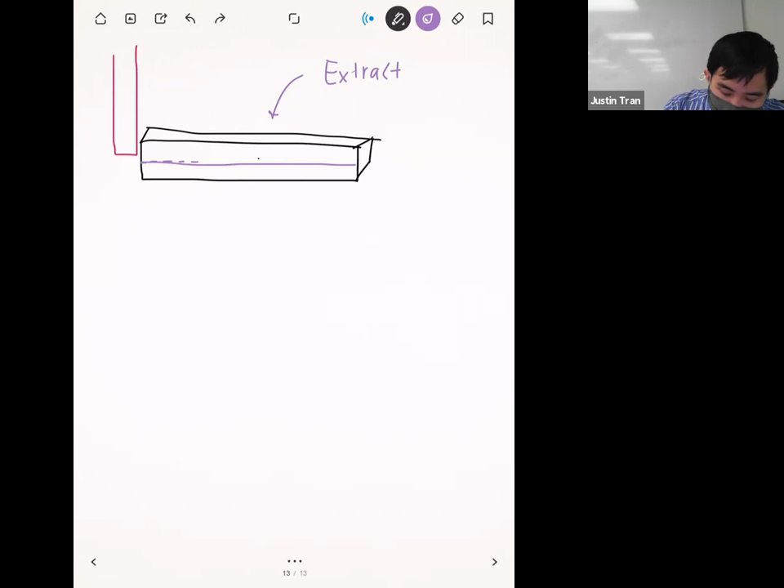So now once again, what we have is a gap like this. Because now this beam, which should be relatively connected to this other part, now that we've reduced it to one dimension, there's a gap in there too.

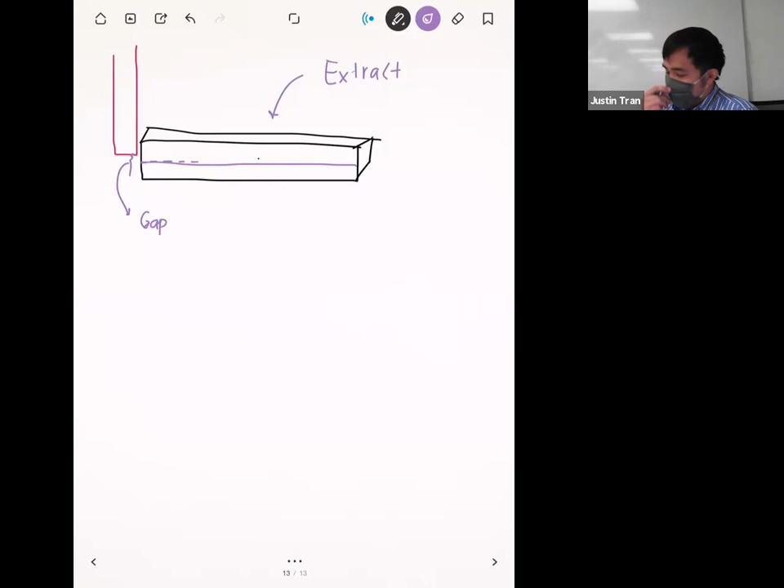But this is not a simple case to fix, because if we try to extend this beam, it's going to try to extend this beam this way, but it's going to say 'I didn't find any surface that way at all,' and so the extension is going to fail. So what you have to do in this case is you actually have to take the beam and physically move this up.

We need to actually modify this geometry and kind of make up this gap right here. We're going to move this beam upwards so that it can actually connect together with that surface.

Situations like this, where you have a mismatch, can also happen when you're extracting beams and stuff. Fixing these can be a little bit annoying, depending on how messy or how not clean your geometry is.

Any questions on this before we wrap it up for today? All right, that's all we got time for, and that's the introduction to shells and beams. On Wednesday, we're going to do an activity where we actually put all of this in practice.

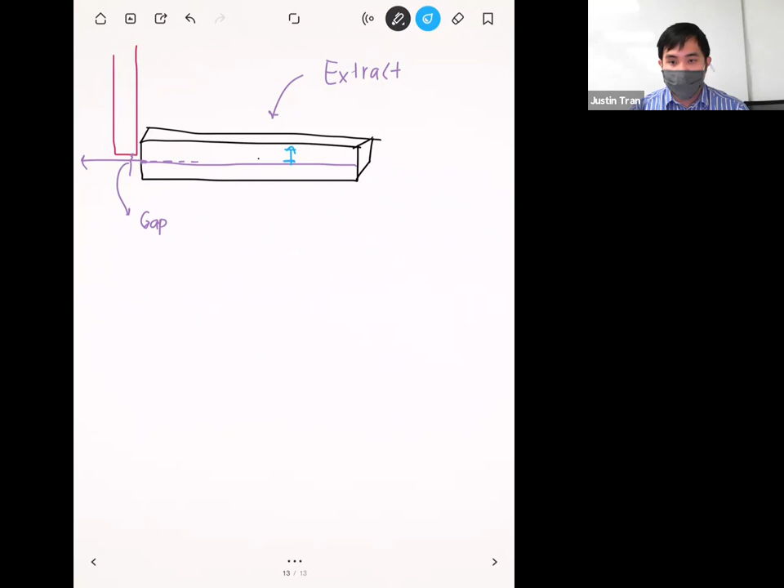Speaking of suppressing things, like in the midterm we suppress the nuts and bolts, but I'm curious, in industrial simulation they're not gonna suppress it, right? Because the nuts and bolts are like...